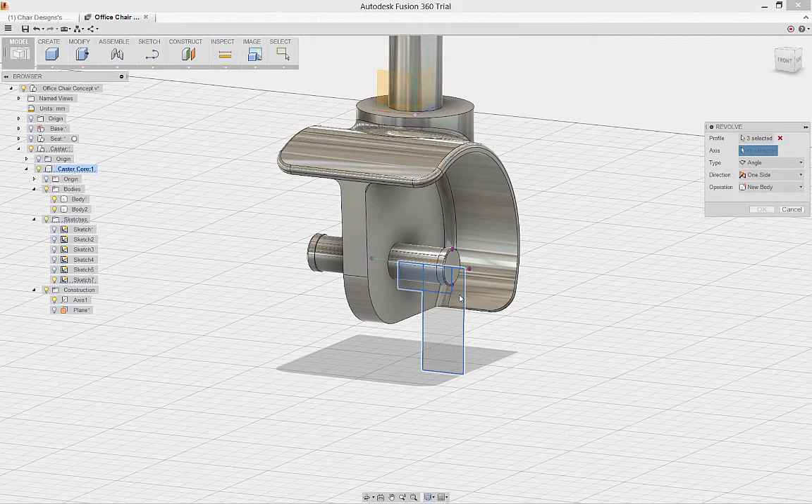With our sketch complete, we can now begin solid modeling. Fusion 360 also contains tools that will enable us to use primitives to create solid models, but in this case we'll use a classic revolve tool. We'll select profiles that we want to use and the axis, and we'll also create a new body.

In Fusion 360, bodies can be represented as though they were parts of an assembly. In this case, we can rename our body Wheel. And since we want to focus on this body, we can go ahead and turn off the other bodies in this component.

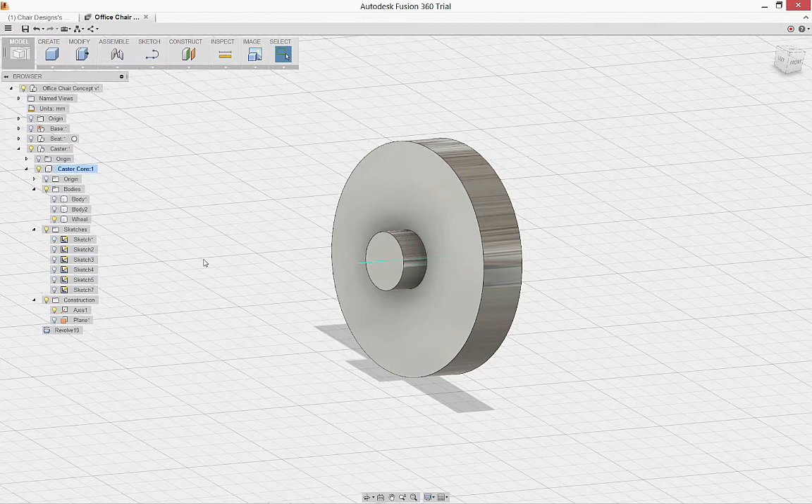With the primary shape finished, we can begin to place features. On the marking menu in the solid modeling environment is a tool called Press Pull. Press Pull is a multifunction tool. It can move faces around, apply fillets to sharp edges like we're doing in this case. We can also find other key tools like the Hole tool.

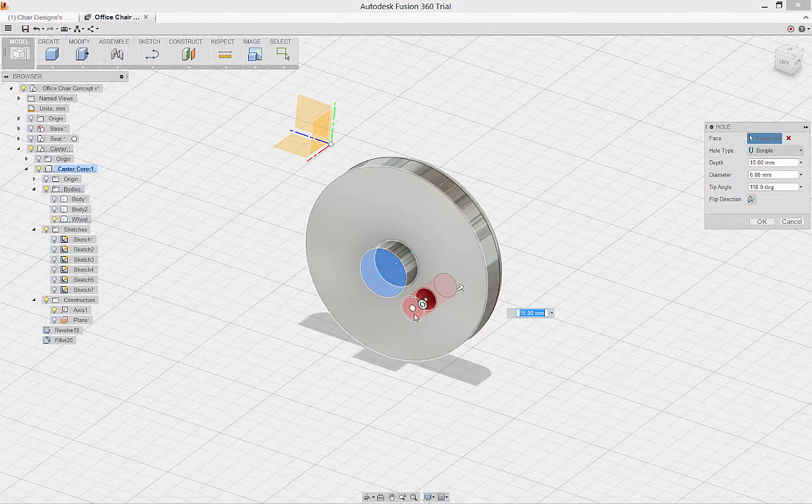We'll select the location. The hole feature can be moved around if we like, but we can also center it very easily by selecting the rounded edge. We'll set the diameter to 8 millimeters.

And we'll change the point angle. Let's get a better view of that. So right now it's a traditional 118-degree point. What we want to do is just have a flat bottom, so we'll set that tip angle to 180 degrees.

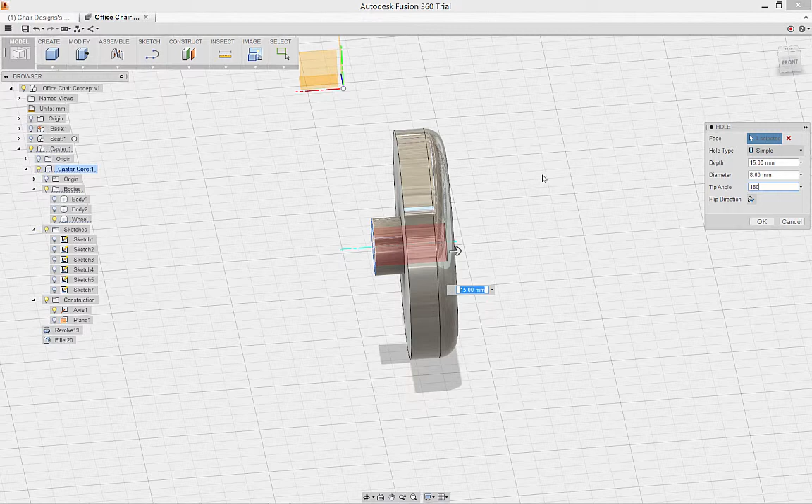We'll set our depth and we'll create our hole feature. Now we want to remove some of the mass from our wheel, so we'll use our shell feature. We'll tell it to remove the large face on the back of the wheel and set the thickness to 2 millimeters.

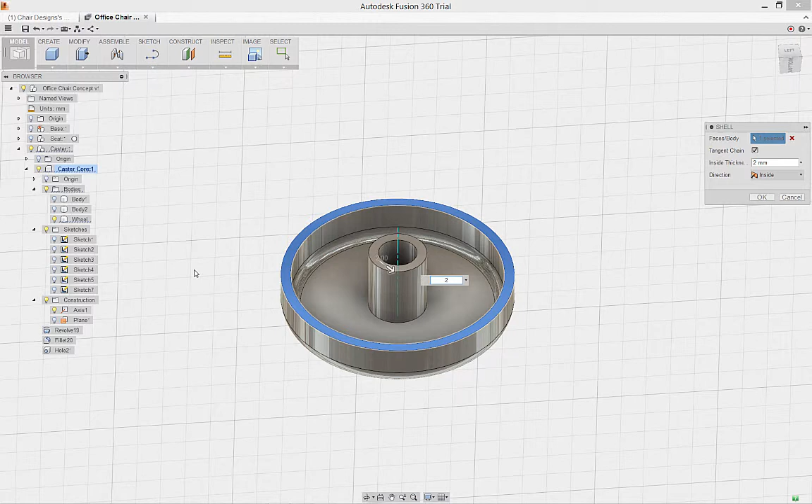Since we've removed a lot of material from the wheel with our shell, I want to reinforce it with a rib. To do this, we need to create a sketch. We'll use the plane that was used to sketch our original profile, and we'll slice our part at the sketch using Slice Sketch. This will open up the wheel to make it easier to see what our sketch is.

First, I'll draw a line from near the hub to near the rim. It doesn't have to be touching. Next, to be able to measure what distance it is offset, I'll project the edge of the rim into the wheel and apply a dimension between the two.

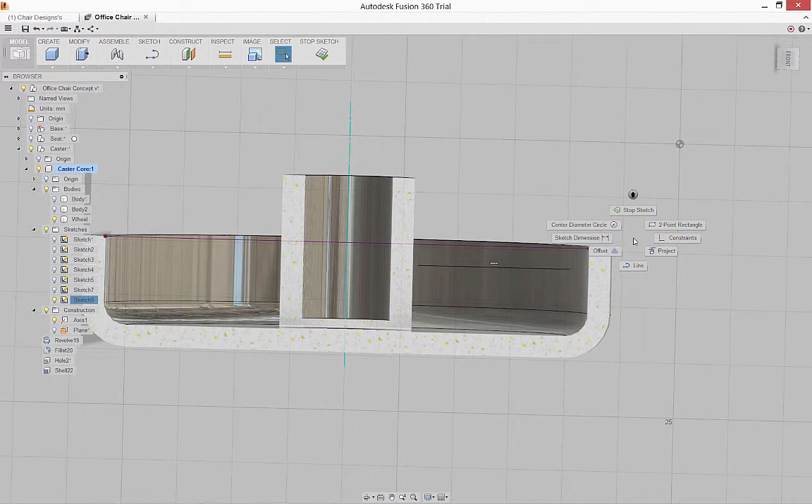With this finished, I can stop my sketch, which will return my wheel to full 3D.

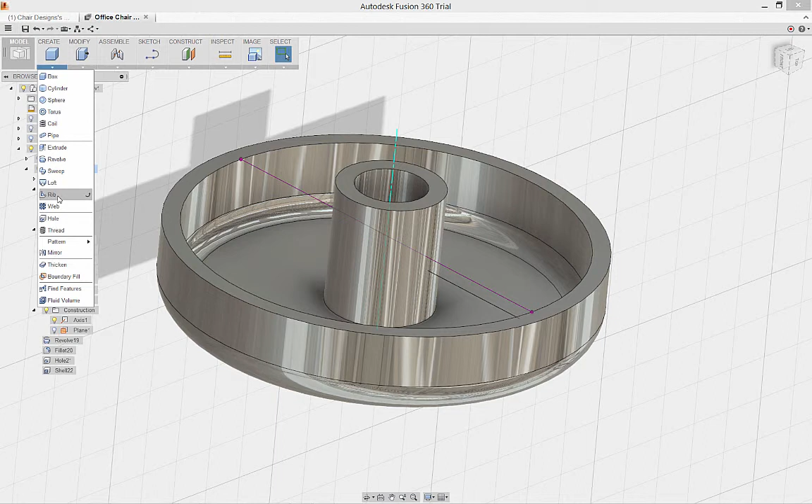And then I'll use the rib tool, selecting just the portion of sketch that I want. I'll set my thickness and set the appropriate direction for the rib. You'll see it fills in the gap.

I'll use the Press Pull tool again to set a 1 millimeter radius on this 2 millimeter rib so it completely rounds the top. I can put another fillet around the base of the hub at any time, and Fusion 360 is able to accommodate this.

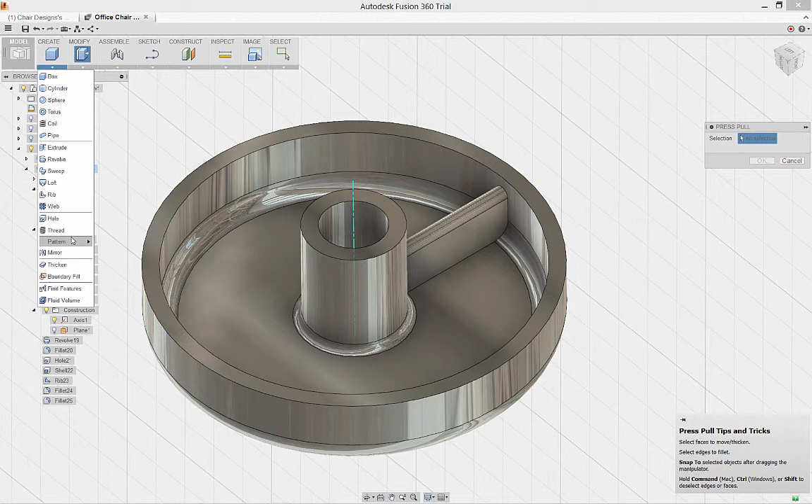Since I'm working without history, I can select the faces of the rib, select an axis, and use a circular pattern to replicate it. Dragging the manipulator, I can set the number. In this case, we'll just stop with 5.

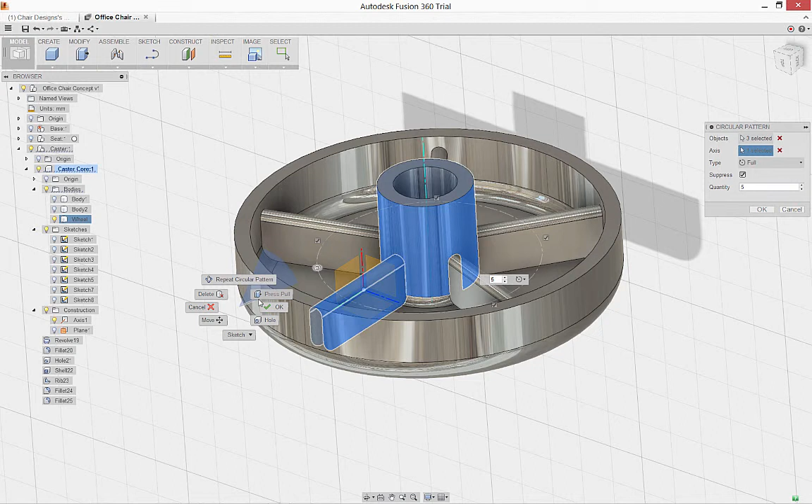I can suppress any instance of the pattern, and we'll just go ahead and create the ribs. Once again, using the Press Pull tool, I'll select some edges to apply fillets between the ribs, the hub, and the rim. And we can just drag out a distance, and we'll apply it.

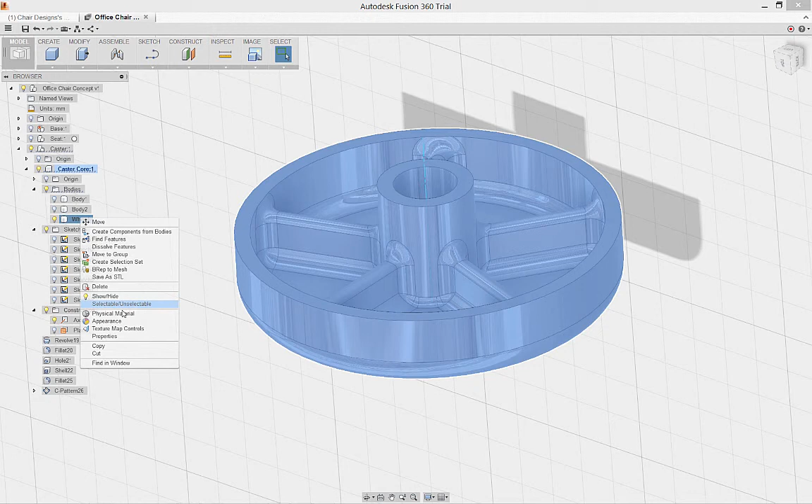Now that I'm finished with the geometry of my wheel, I want to go ahead and make it stand out a little bit. I'll set an appearance override for this model. I want to use textured plastic with a random pattern on it.

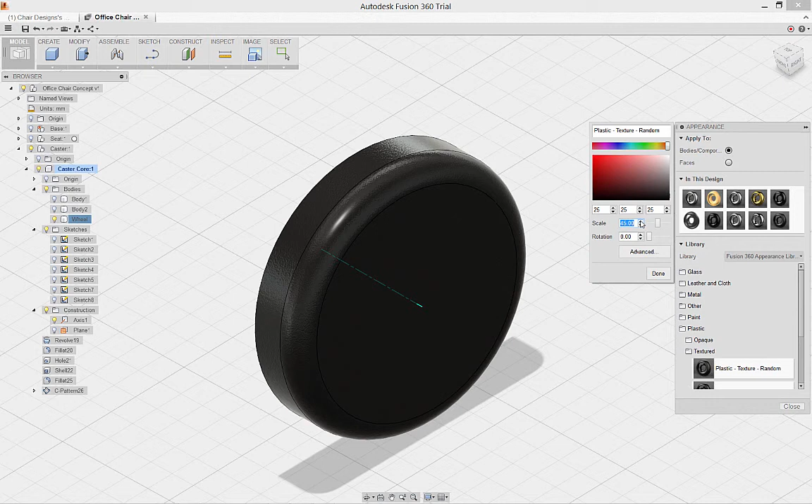It looks pretty good, but I'd like to just modify it a little bit. This is a situation where you can have a little fun and just explore different patterns. Let's go ahead and apply it with just a little reduction in the scale. And I think we'll call our wheel complete.

Let's bring back the other two bodies that are members of our caster core, and we'll be ready for the next steps.